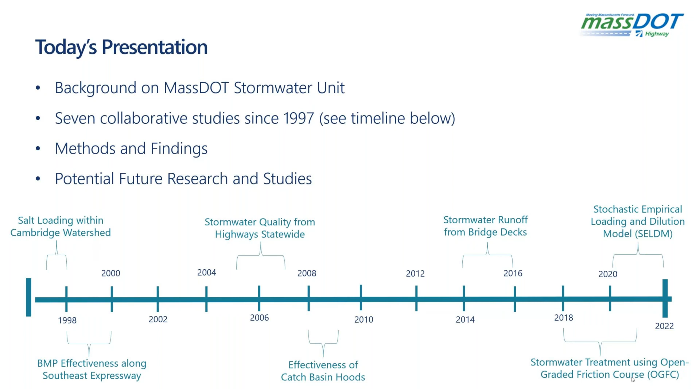For those who are familiar with DOTs and how they're set up and their mission, this might be a little familiar, but MassDOT is constructing and maintaining its transportation system. Within DOT, as Elena was saying, we have the Highway Division, and within that is the Environmental Services section, which is broken down into these specialty units, and the Stormwater Unit is one of those units within environmental. What we do in the Stormwater Unit is review projects to make sure they comply with both state and federal regulations, and then from MassDOT's perspective, make sure that the measures being used are cost effective and practical.

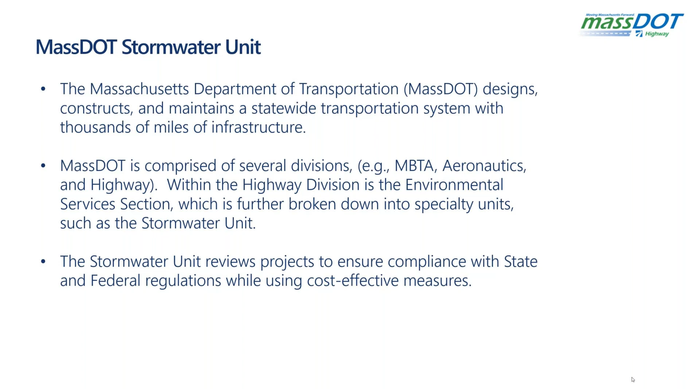So I'll start with the first study. This was my introduction to U.S. Geological Survey back in 1997, thereabouts. I want to mention, as Elena did as well, that these studies pretty much all were driven by environmental regulations on some level, in an effort to comply with environmental regulations.

In this regard, the Cambridge Water Department had concerns about the I-95 that runs adjacent to one of their main drinking water reservoirs, the Hobbs Brook Reservoir. I'm assuming you can see my cursor - this is 8 lanes of I-95 running north and south. Their concern was that our de-icing operations, our winter maintenance, had the effect of elevating salt concentrations in their drinking water.

So what USGS did first is set up a variety of sampling stations - these sheds you see over to the right - and inside there they had the automatic samplers, the tubes, electricity and so forth. What's happening here is the USGS employee is calibrating the stream flows using velocity sensors and so forth. Basically, once the concentrations are taken from the sample bottles within the shed, that translates into how much loading is occurring - the concentrations in the stream reflect the amount of loading to that subbasin to the reservoir. So that's trying to get this closure of measurements.

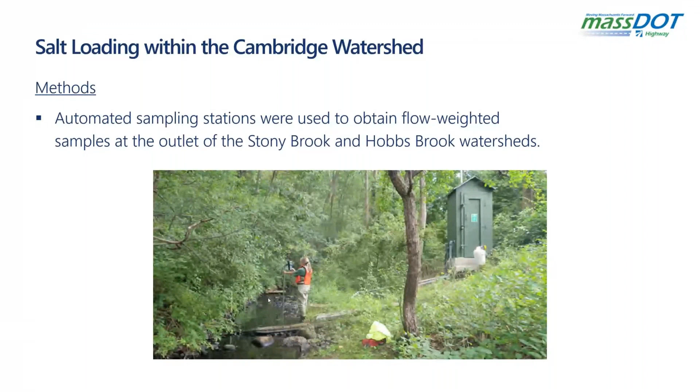Okay, so this is a schematic of the watershed for the Cambridge Reservoir, and up at the top right-hand corner is this dark green sub-basin, this drainage area, and that's the drainage area to the shed that I just showed you, and that red triangle is the sampling shed that leads to the reservoir.

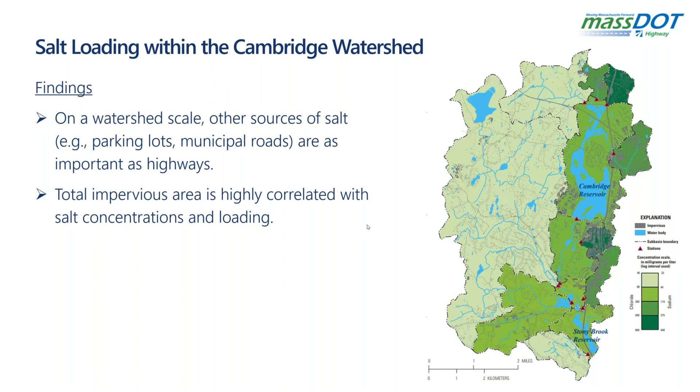Now, one of the findings from the study was that looking at the entire watershed, there are lots of other sources of salt, including parking lots and municipal roads, and it's not just this highway, I-95, and a couple others, that is the primary source of salt to the reservoir. And the other finding is that, very logically, the more impervious area you have, the more salt concentration and loading you're going to have as salt is put down to melt ice, essentially.

The next study was done soon after. It was in the late 90s. And this is the cover page of the report. It shows I-93, the Southeast Expressway going through Boston. It shows one of the sampling sheds on ground level. And the objective here was to determine how some best management practices performed in treating stormwater going from the highway to essentially Boston Harbor or Dorchester Bay.

And just a little aside, not that important, but we called them best management practices until recently. Now we call them stormwater control measures. It's a little bit more of an exact terminology, so pardon me if I use BMPs and SCMs interchangeably.

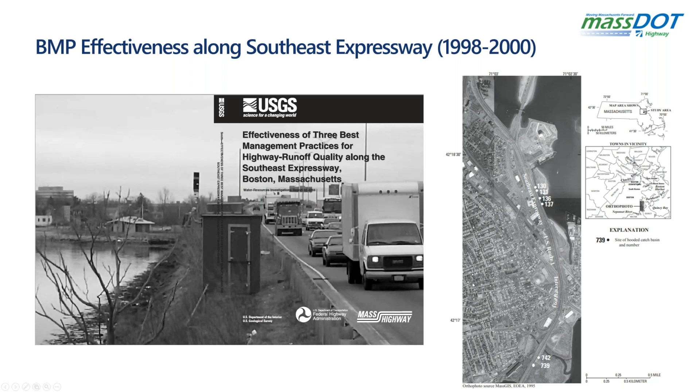So you'll see over this aerial photo to the right, you have the 4 different, well, there's a total of 6, but these points are the sampling sheds that took samples throughout the study. And you can see the north-south highway and then Dorchester Bay off to the east.

Okay, so the methods were interesting. We looked at two water quality inlets. These are underground rectangular concrete boxes. They have these baffles running through them, sort of like a first chamber, second chamber, third chamber, as well as a deep sump catch basin. And what I'm showing you here in part of the methods, we'll talk about this a little later, is this static mixer assembly.

It's funny. When I was starting out in this business, before I was enlightened by Kirk Smith at USGS, who I consider a mad scientist and very smart, I learned that it is critical that the sample you take is well mixed, that it represents the water column from which you are taking this sample. In other words, if you don't mix your sample, where does one put the sample tube intake? If you put it low at the bottom of the pipe, then you get the heavy stuff, the sands and fine sands, but that is not representative of the whole water column, where you have the finer particles, the clays, the colloids at the top.

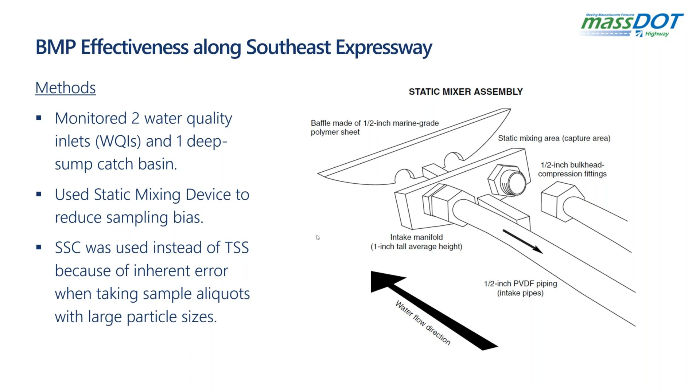And then the other thing is that USGS uses SSC, suspended sediment concentration, instead of total suspended solids, because there are, let's say, analytical errors when you are measuring total suspended solids, and you just can't help but, when you're taking sample aliquots, miss the larger particle sizes, or at least some of them. So that was another, I thought, important point in the spirit of reproducibility and accuracy.

So this slide reflects what we kind of went through to take samples and conduct this study. What you're seeing is a couple of manholes to one of the water quality inlets. And again, it's this large concrete box underground. It's not easy to get to. We used confined space entry protocol. We blew fresh air down there, used respirator masks and a harness, and so on.

And one of the findings is that the sediment there was not a uniform layer in this box. So this idea that you could look in there and measure with a stick, or even use a vacuum hose, and just stick it into the middle and assume that it's representative of the entire underground box, was not true. You had this drifting into the corners, where the sediment depths were much different at the edges of the box versus in the middle.

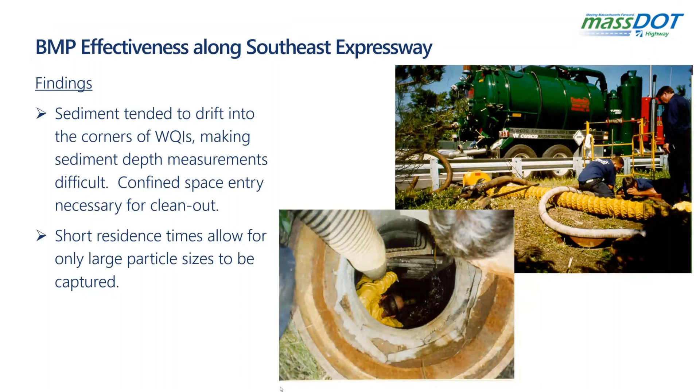Okay, moving on here.

So again, with these fine particles, you have large surface areas for adsorption. These sorts of electrical charges are greater in the finer particle sizes. And overall, when looking at the highway runoff from the Southeast Expressway, 68% of the sediment was less than, let's say, the sand-silt cutoff at 63 microns, and 86% was less than the superfine sand size.

So what that means basically is that the great bulk of particles in the highway runoff were relatively fine particles, and therefore, that would be your target, to get those finer particles, which these water quality inlets were not that good at. They were not efficient at doing that.

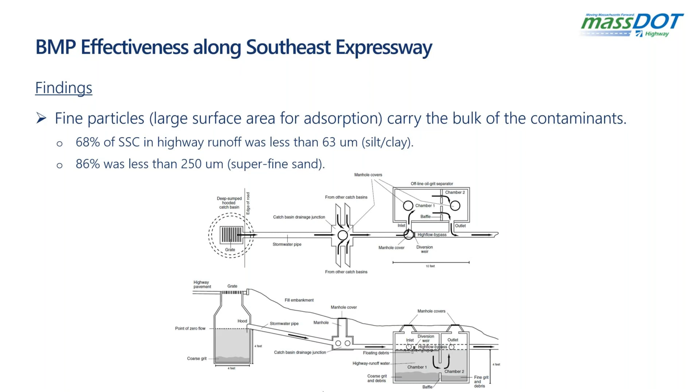So at the end of the study, the deep sump catch basin was measured as capturing 39% of the suspended sediment concentrations in the stormwater. And why I have that on the slide, not 25%, is because that's what our state DEP gives us credit for deep sump catch basins, 25% TSS removal. And so it was significant that these catch basins captured quite a bit more than that.

And then the water quality inlets captured 32%. But again, it's not really comparing apples and apples, because that 32% was after the catch basins. So if you didn't have catch basins, that number would be quite a bit higher. I don't know what it would be, but it would be more than 32%.

And it's interesting too, because in our experience, when vendors advertise, oh, hey, here's our new hydrodynamic separator, does all this stormwater treatment, typically their measurements are based on not having an upstream catch basin to capture the real heavy stuff, which is always the configuration. So you're building in some bias if you don't use deep sump catch basins before you measure the effectiveness of your downstream hydrodynamic separator.

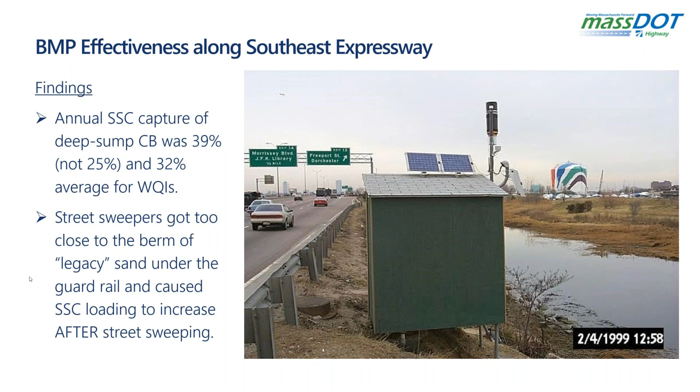So what happened was that the wire brushes of the sweepers ran into these legacy berms of sand under the guardrail from years and years of winter sanding. And so once they hit those berms, you had much more sediment out there in the street, ready to be mobilized during the rain. So that's why we got that kind of counterintuitive finding.

This is a good slide because, like I was saying before, we were challenging some of the findings of these vendors of other proprietary devices, where they would come up with some very unbelievable findings, like 90%, 95% effective at TSS removal and so forth. But when you really dug into their methodology, we found that they were measuring displacement more than treatment.

In other words, if you look at these slides, what the vendors were doing was on the left. They took a fully settled and stabilized BMP, an underground box, and everything had settled. It hadn't rained for many, many days, and it had clarified through settling. And so your supernatant in the chamber was very clear.

And then they measured the storm coming into the inlet of the chamber. So you can see on the left, it's very muddy, and what was coming out was very clear. And so they said, wow, look at that treatment. But if they just waited a bit longer, like we did in this study, you can see in the slide to the right that the inlet and outlet sediment concentrations were very similar.

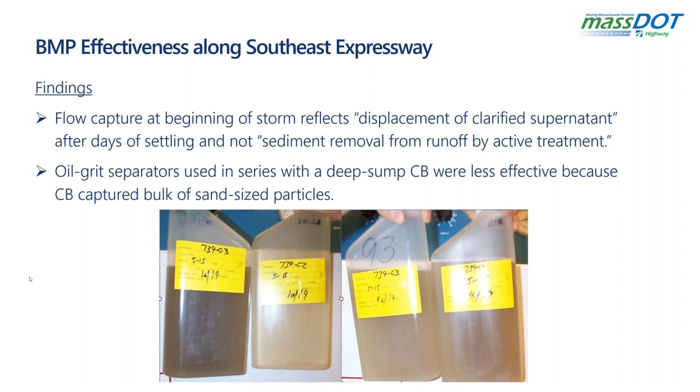Okay, I think I've already hit the first point. The second point, this was really a great idea. Again, that learning experience for me is that the greatest source of error in one of these BMP SCM sampling studies, to ascertain the treatment effectiveness of a BMP, is what is going in the BMP.

In other words, you have this muddy solution being conveyed into this box or chamber or basin, what have you. And now, how does one get a representative sample of what's going into the measured BMP SCM? And no matter what you do, even with that fancy mixer device, there's still going to be error.

So what USGS did in this study is that they measured what came out, the concentrations of the water coming out of the BMP, which was relatively well mixed and, let's say, uniform throughout the water column. Plus, they measured what was captured in the BMP.

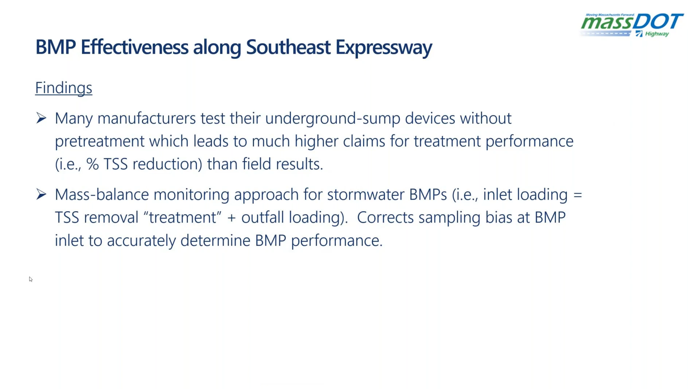All right, so they essentially dewatered it and measured what was captured, and they backed into what came into the BMP. And again, it is kind of an accuracy quality control check, but they called it the mass balance approach, and it was a great way to correct for sampling bias, particularly in the inflow to the BMP. So that was good.

Okay, going to the next study, a few years went by, and then MassDOT was trying to address this issue of, well, geez, what are highways contributing in terms of contaminant loading? And we were facing these total maximum daily loading reports and these regulatory authorities asking, what's this highway project going to contribute to our receiving waters?

And there was kind of a trend or a sentiment to conduct individual project-based studies on contaminant loading from each project, and it was just out of the question. These are very expensive studies.

So at around that time, Greg Granato was developing his SELDM model, the stochastic empirical loading and dilution model. And so this had a lot of promise to model contaminant loading from highway projects, rather than do standalone water quality studies.

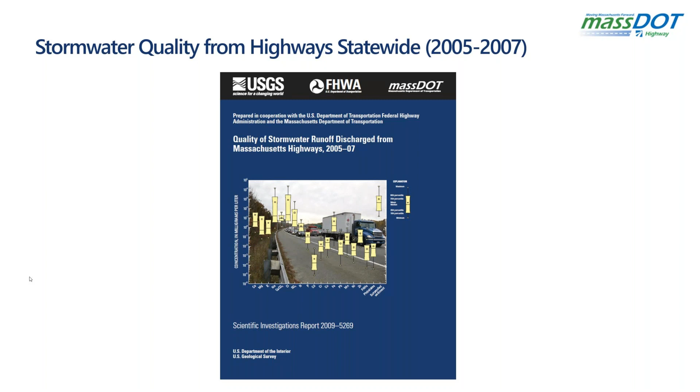And now that SELDM model can be used throughout the state. You put in your parameters, your lat and long and rainfall and stream flow and impervious contributing area and all these parameters. And at the end, you can get a very good idea of the contaminant loading to the receiving water. So that's sort of a summary of why we did that study.

And we had these monitoring stations at 12 locations at 8 different highways, again, different average traffic volumes, and we had a couple of interstates, a couple of smaller highways. And here you can see this kind of sampling shed or cabinet with the automated sampler in there, and all the tubes and wires that go with that. And again, we did all this to calibrate the SELDM model.

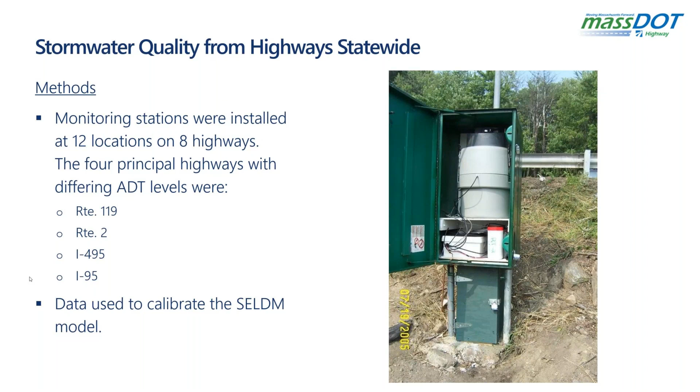One of the findings is that, while we're looking throughout the state right now, and I'm assuming into the distant future, MassDOT does very little traction sanding during the winter. We just found that it makes a mess. Sand grains get rounded very quickly. They blow off the highway. So it's just like spreading mud everywhere. So we really don't do that anymore.

But back then, there was more road sanding. And the finding was that compared to a highway that was just salted, not sanded, there was significant contaminant loading, particularly nutrients and metals, coming from that traction sanding. And what you see here, the slide shows developing a flow rating curve using water levels and depth sensors and that sort of thing.

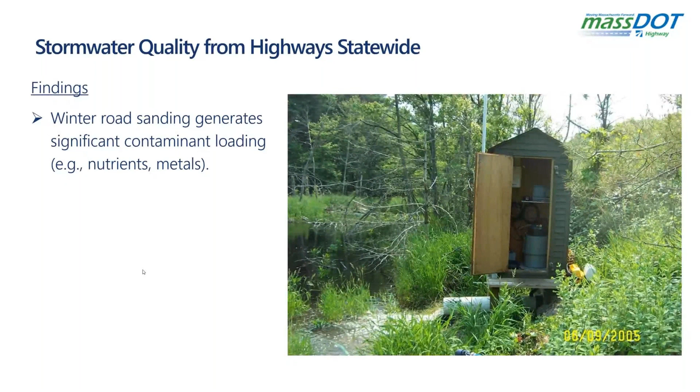So another finding is, you've heard of this NURP data, urban runoff pollutant data, that was taken over some years, many years ago. And for whatever reasons, the concentrations that basically were being assigned to Massachusetts highways were much higher than what we found. Particularly cadmium and lead were way less than they were being credited for from this historical data.

And for example, lead: unleaded gasoline became the norm, and so that probably explains the lead difference, and cadmium, maybe better tire life, and this and that. There's also significant difference between the other constituents: copper, chromium, iron, zinc, phosphorus, nitrogen.

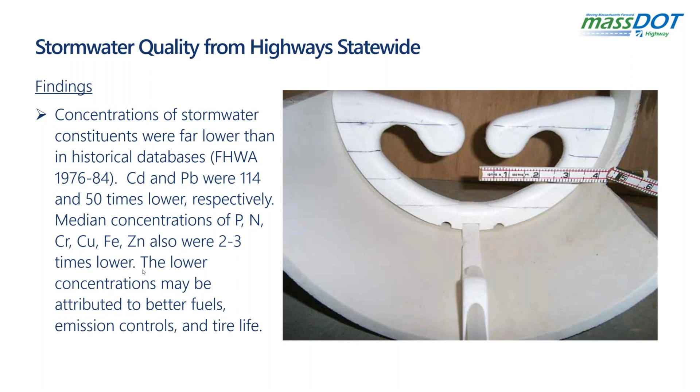Another finding is that local soils matter, and again, road sands. These are primary sources of phosphorus, and when you're modeling runoff concentrations, you want to consider soil chemistry and surficial geology.

As far as the pictures here, this was all part of calibrating the flows and the automatic sampler. The static mixer was used, and you can see in the bottom right that after going through the mixer, it's so turbulent everything is very well mixed, and then the sample tube withdraws the sample aliquots to the automated sampler. This way we're getting the whole range of particle sizes, and it's a much more accurate measurement.

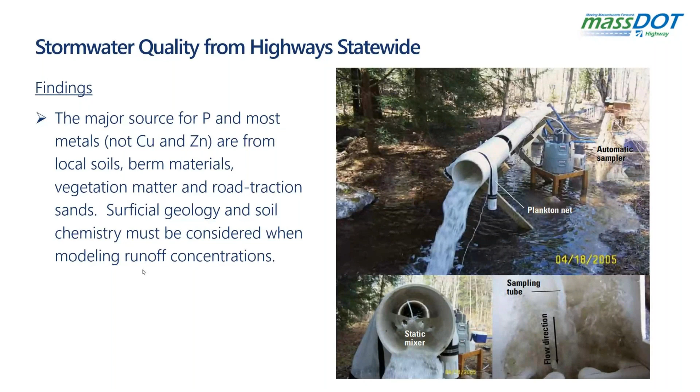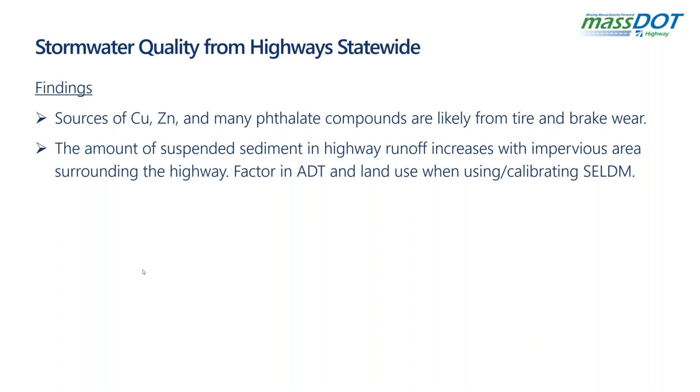So this slide shows that copper, zinc and phthalates were likely coming from tire and brake wear, and I guess road salt too. Suspended sediment concentrations increase as the impervious area surrounding the highway increases, and traffic volumes and land use should be factored and considered when using or calibrating the SELDM model.

This was another study having to do with catch basin hoods, and it's interesting how much there is to learn about them. One thing I've discovered over the years is that they're not used very much elsewhere in the country. I think the idea came more from sewage treatment than stormwater treatment. But rather than put these everywhere in each of our catch basins, we thought it'd be a good idea to see how effective they were and if they're even worth the effort of installing.

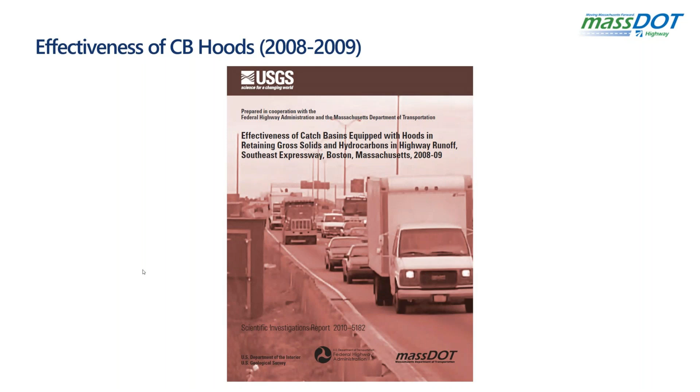So we used 3 different ones. One is called the snout, which is actually glued to the inside of the catch basin, with a gasket along the edge. The next type of hood is called an eliminator, which you see to the right. It's just a plastic hood, and it looks simple, but it really is...

In my estimation, the best hood that MassDOT could use, because there's no bolts, no gaskets, no glue. You just use friction and put it into the outfall pipe, and it has a sleek profile, so it's less likely to get knocked off by a clamshell excavator when you go to clean it. It also has a yellow disc that's a clean out if something gets in there and gets clogged.

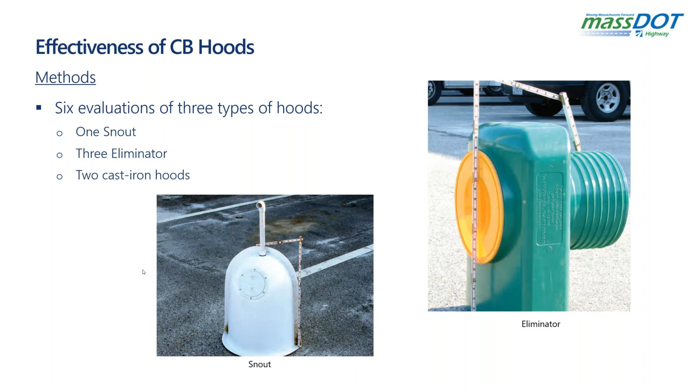So we found in these findings that most of the floatables pass through the grate. It's funny when you think about a catch basin, the cast iron grate is actually kind of like a very coarse filter, and it keeps a lot of stuff out of the drainage system, out of the catch basin, in terms of trash and organic matter. But what does make it through over time, unless you're there to capture it right after a storm or soon thereafter, becomes neutrally buoyant eventually and then kind of sinks and floats around and gets sucked out of the catch basin anyway.

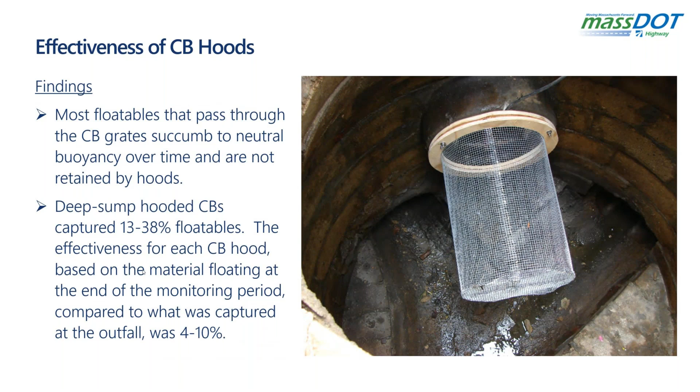So when it's all said and done, what was captured at the outfall, which is what this sort of screen mechanism device that USGS uses measured, really wasn't that significant — 4 to 10%, something like that. It isn't that they do nothing, but it's really like anything: is it worth the expense and the difficulty of installing hoods?

We looked at the different types of hoods and found that for certain composite samples, there was not much difference, and that oils, greases and total petroleum hydrocarbons were emulsified in the sump of the catch basin. So basically, if there was any oil or grease that got in there, it would just get mixed up and get conveyed outside of the catch basin, just like anything else in the water. So this theory that there's going to be a layer of hydrocarbons captured by the hood was not what we found.

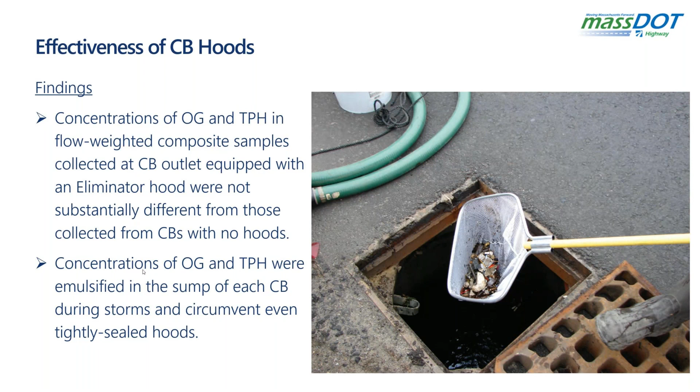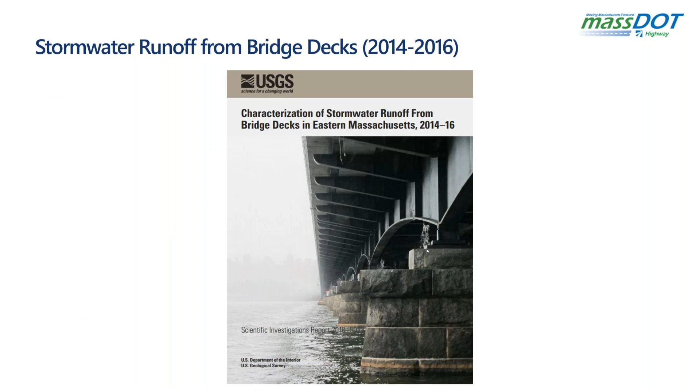The idea behind the study was, how much phosphorus is actually coming off of bridges? My assumption was that because there are no surrounding soils on this standalone, elevated bridge, the phosphorus could only be coming from atmospheric deposition or maybe something carried on by car tires. I assumed the phosphorus loading would be negligible. So that's why we conducted the study, to try to ascertain the importance of phosphorus treatment for bridges.

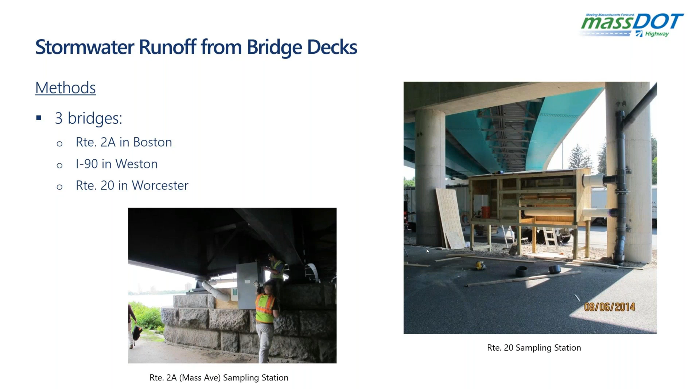So the findings: in fact, there was some phosphorus coming off these bridges, and more than we thought. The primary source was the bridge itself, both from erosion of the asphalt surface, as well as sediment that got on the bridge. Instead of getting blown off like on a typical road into the shoulder or grassy edge, it was being retained by the walls and curbs along the bridge.

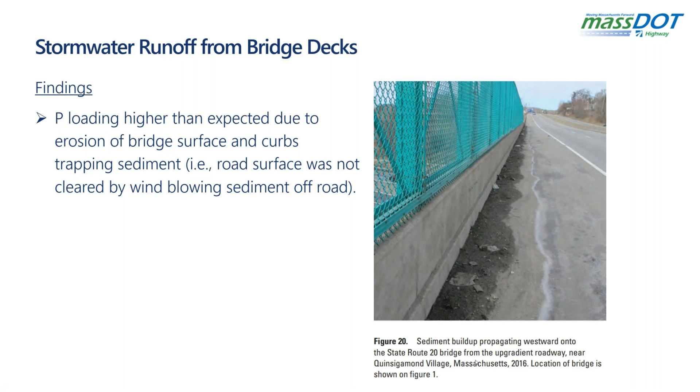This is showing the sediment buildup within the approaches of a bridge, here on this Route 20 bridge. The majority of the sediment was coarse-grained, sands and small gravels, which indicates that the actual bridge itself was subject to erosion. You can see images of spalling concrete and so forth.

So it seems like the moral of the story here is that if you want to reduce sediment loading and phosphorus loading, you need to stay on top of your bridge maintenance and make sure the surface is in good shape.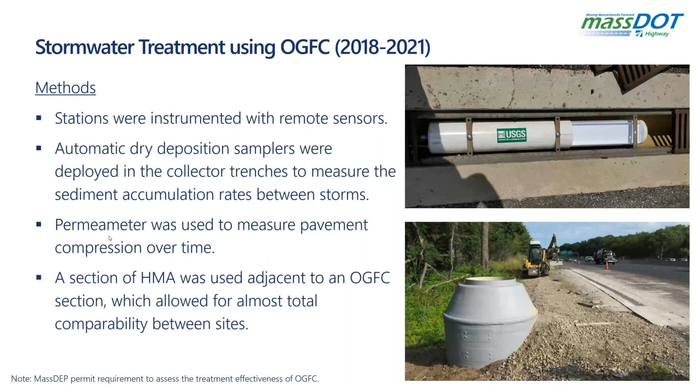Now this is the pavement permeability measurement. That's what we used the permeameter for, and there you can see Kirk and Phil doing lane closures at nighttime. It was very surreal, taking water measurements at midnight on a highway, but that's basically what it looked like.

Water gets poured in, and then Kirk would time how long it took for the water to fall down this cylinder, hence the measurement of the permeability of the pavement.

This study went on for 3 years and looked at more than 200 runoff events. Not to throw anybody under the bus, but it's a far more comprehensive study than others that have been done, like in Texas and so forth, where only a handful of storms were measured.

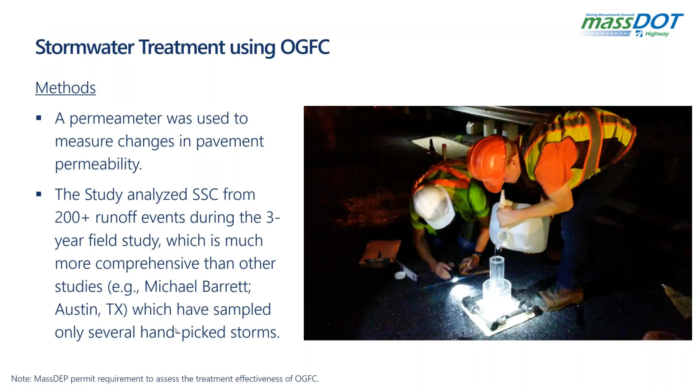Here's what it looks like from the aerial view. You have the open graded friction course and the contributing area, these purple lines, and then that's the grade, the topography of the highway. The black lines are the actual drainage area, and the red triangles are the sampling stations.

Our preliminary findings, because the report hasn't come out yet but probably will in late fall or early winter, are that the open grade friction course exceeds typical pre-treatment BMPs, which typically get credit for 25% sediment removal, and that the sediment coming off the open grade friction course was consistently lower than that coming off the hot mix asphalt densely graded part of I-95.

So both findings were great and somewhat expected, but it was good to see it really run through the rigors of USGS protocol, methodology, and quality control.

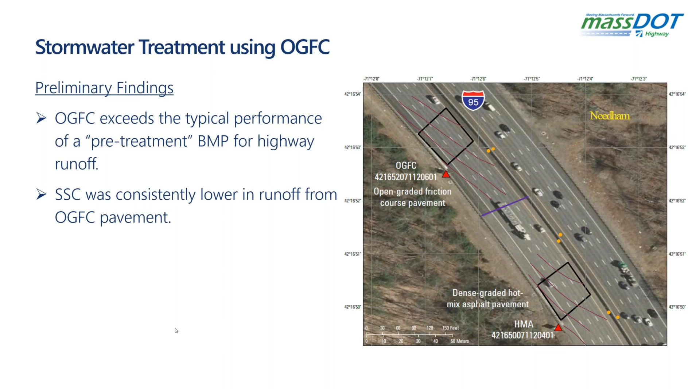More preliminary findings: sediment particles were retained in the voids, which I already went through. Increases in the open graded friction course pavement showed some clogging over time, and that makes sense, it's all conservation of mass. If it wasn't in the runoff, it was in the pavement, and as the pavement filled up with sediment particles, it became less permeable, and treatment efficiency went down as well.

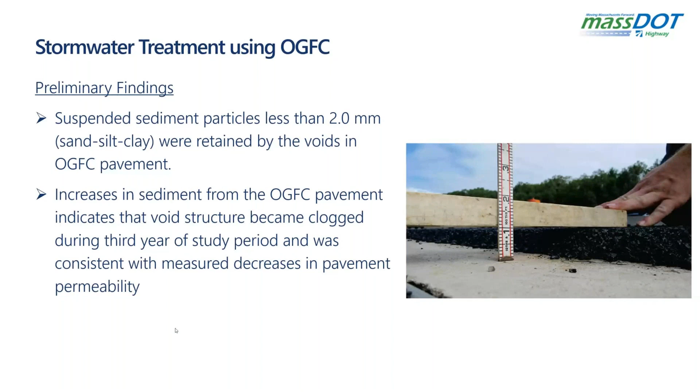Okay, now this is kind of a goofy couple of shots, sort of to test if you're still awake. The first shot on the left is right when I was asking Kirk exactly when he was going to publish the final report. Then in the shot to the right, I couldn't find Kirk, he was unable to provide an answer to that question. So that's the nerdish water quality joke there.

We are going to use this same site to look at the effectiveness of salting on this pavement as well. It's a great opportunity and great synergy, because one problem is when it snows, these nooks and crannies fill up with snow and ice, so the operations people, the plow operators and salters, feel compelled to hit the pavement with more salt to try to burn out the snow and ice caught in the highway. So we're trying to figure out how necessary that is, and how effective salting actually is for open graded friction pavement.

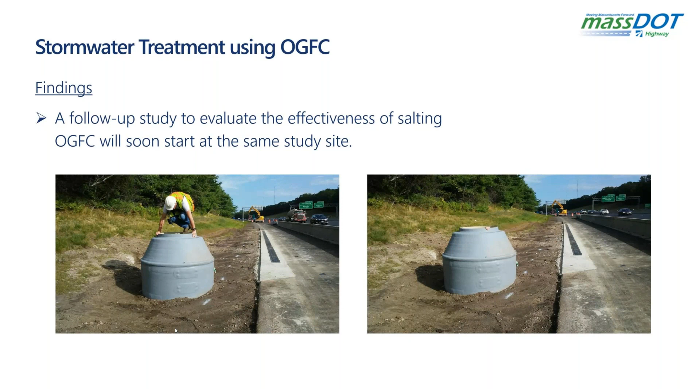Okay, here's the last study, done by Greg Granato, who ran a bunch of simulations using the SELDM model to see how different highways and urban runoff behaved throughout southern New England.

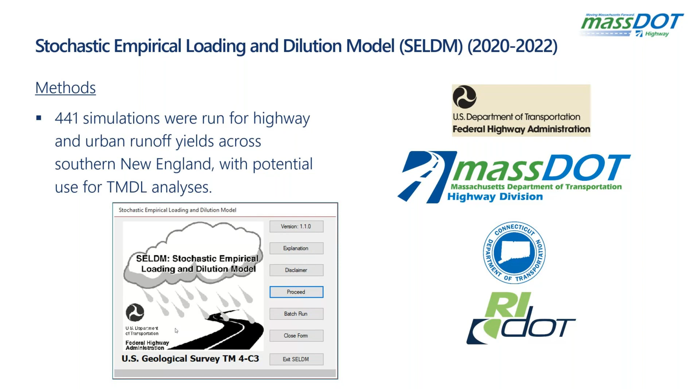His findings were interesting. He measured highways in and around Narragansett Bay and determined that the nitrogen loading to Narragansett Bay, which is an issue for the ecological health of the bay, showed that highways contribute a very small fraction of nitrogen, essentially because they made up a very small footprint of sources of nitrogen in the watershed.

And then the other one I thought was a lot more interesting, and that is this whole idea of offsite mitigation for stormwater management and achieving water quality benefits. This is a difficult graph to interpret, and I wish I was better at it, but what it shows is that...

Upstream in a watershed where phosphorus concentrations are low, BMPs can be considered effective, I guess. But as you hit greater concentrations of phosphorus lower in the watershed, it really doesn't matter how many BMPs you use, relatively speaking, because you're just not going to get phosphorus concentrations down on a watershed basis.

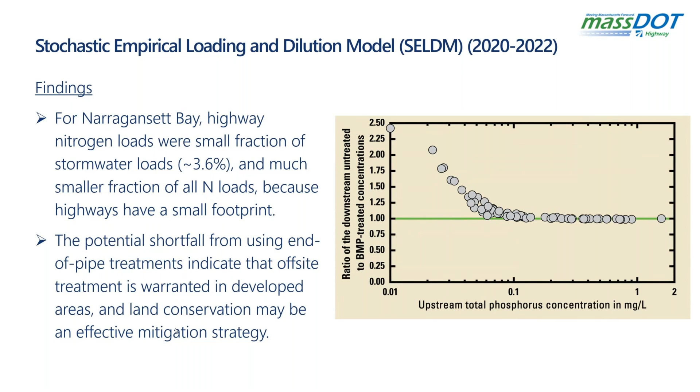So I think these findings open up that door, that question. Is it best for DOTs throughout the country to be designing, building, and cleaning these BMPs in perpetuity, forever, with the tax dollars that go with that, versus maybe a one-time charge of purchasing undeveloped land upstream? So I hope I did that justice. It's a tricky one to explain.

Future research and studies include, like I said, the salt efficiency for de-icing open graded friction course. At what point do you... just because it looks like there's snow in the nooks and crannies does not necessarily mean you haven't met your friction targets. The second bullet is preserving headwater parcels.

The third bullet is using vacuum sweepers. Like I said, the pavement loses effectiveness over time, so how effective would vacuum sweepers be? Is it worth the effort to remove sediment in this situation where it's been collecting sediment for a bunch of years in this type of pavement?

PFAS has become more of an issue, and we really haven't studied that in roadway runoff at all. Looking at how phosphorus is differentiated between total and dissolved in both hot mix asphalt and the open graded friction course.